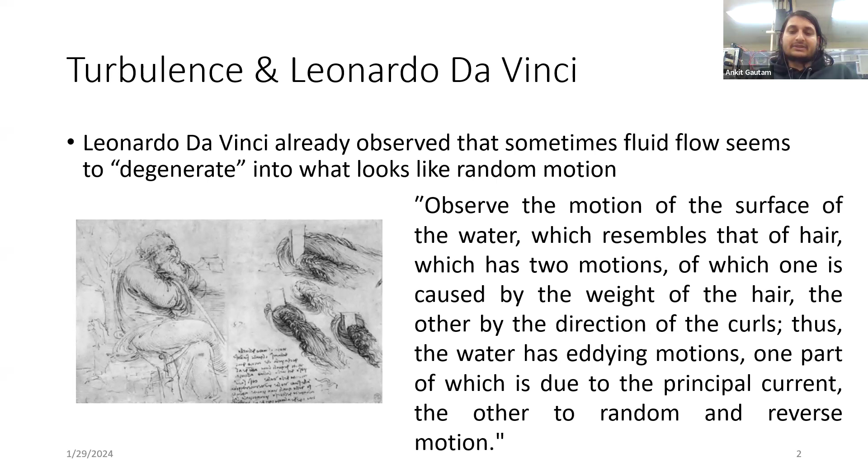First, turbulence was studied by Leonardo da Vinci. He observed that sometimes fluid flow seems to degenerate into what looks like random motion. Observe the motion of the surface of water, which resembles that of hair, having two motions: one caused by the weight of the hair, and the other by the direction of the curls. Thus, water has eddying motion, one part of which is due to the principal current, and the other to random and reverse motion.

Then turbulence was studied on the basis of Reynolds. Osborne Reynolds found that if viscous force dominates, the flow stays laminar, whereas when inertial force causes the non-linear term to dominate, it transitions to turbulence. He characterized this balance using the Reynolds number, which is the ratio of inertial force to viscous force. Flows become unstable above a certain Reynolds number.

Simple examples are two-dimensional jets, wakes, pipe flow, and flat plate boundary layers, while others are more complicated three-dimensional flows. There is a transition between laminar and turbulent flow as the Reynolds number increases.

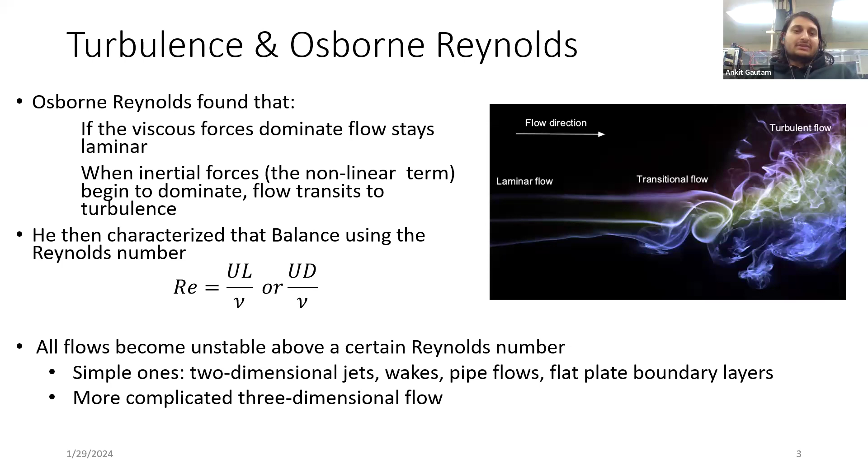How can we define turbulence? Is the flow turbulent? How can we know that?

Along the surface in external flow, when the streamwise Reynolds number is greater than 5 times 10 to the power 5, or around an obstacle when the Reynolds number gets more than 20,000, or in internal flow where the Reynolds number gets more than 2,300 - these are factors in terms of Reynolds number when the flow becomes turbulent.

Other factors such as free-stream turbulence, surface condition, and disturbance may cause an earlier transition to turbulent flow.

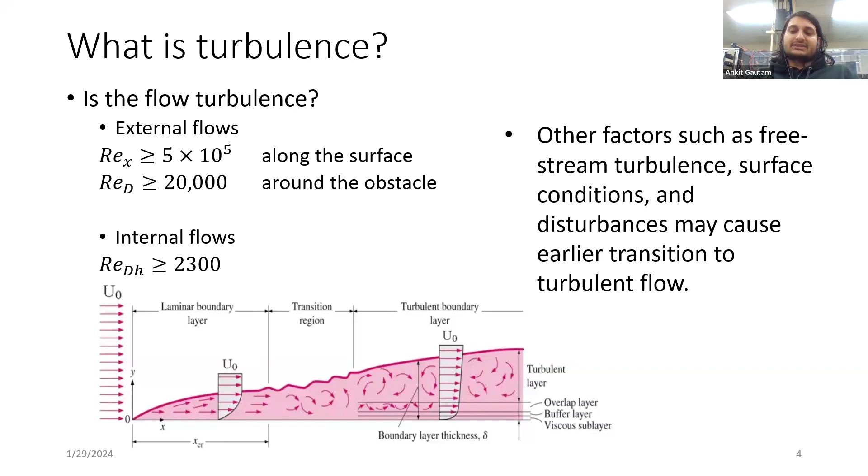What is turbulence? Chaotic and random states of motion develop in a flow, and it is termed turbulence. In turbulent flow, the velocity and pressure change continuously with time. The velocity fluctuations give rise to additional stresses on the fluid.

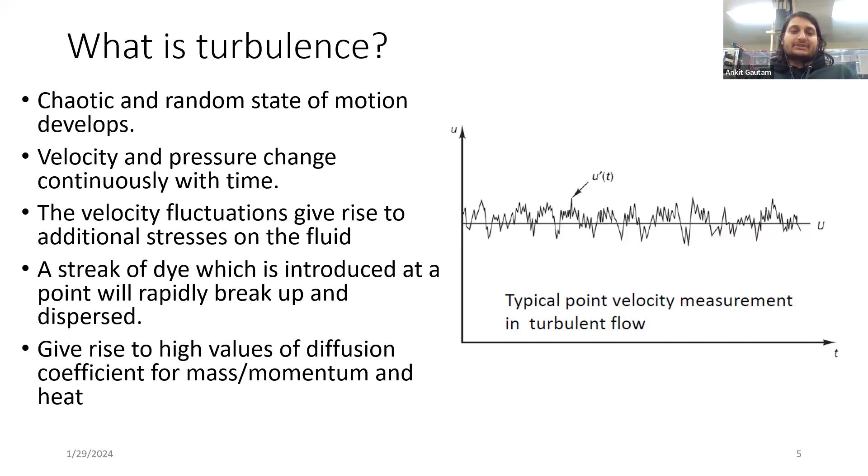A streak of dye introduced at a point will rapidly break up and disperse. This is a simple example of something passed into turbulent flow. The turbulent flow gives rise to a high value of diffusion coefficient for mass, momentum, and heat.

These are some characteristics of turbulent flow. Turbulent flow always occurs at high Reynolds number. They are caused by the complex interaction between the viscous terms and the inertial terms in the momentum equation.

One characteristic of turbulent flow is their irregularity or randomness. A fully deterministic approach is very difficult. Turbulent flows are usually described statistically.

Turbulent flows are always chaotic, but not all chaotic flows are turbulent. The diffusivity of turbulence causes rapid mixing and increased rate of momentum, heat and mass transfer.

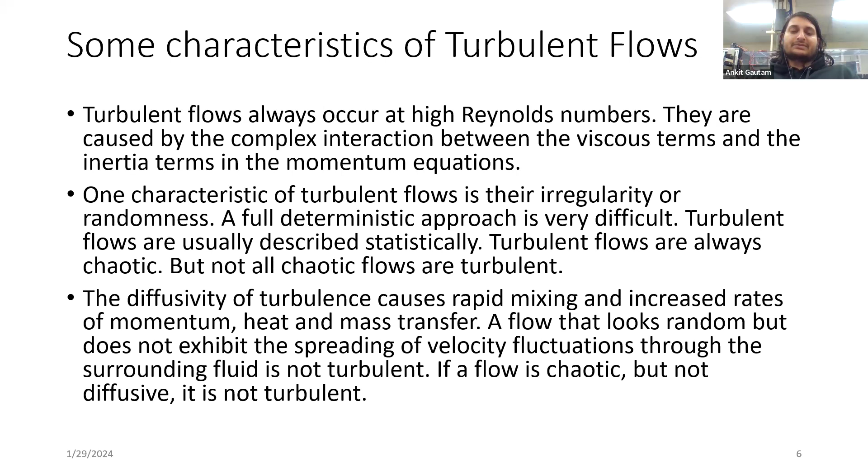A flow that looks random but does not exhibit the spreading of velocity fluctuation through the surrounding fluid is not turbulent. If a flow is chaotic but not diffusive, it is not turbulent.

Turbulent flows are dissipative. Kinetic energy gets converted into heat due to viscous shear stresses. Turbulent flows die out quickly when no energy is supplied. Random motion that has insignificant viscous losses, such as random sound waves, is not turbulent.

Turbulent flows are rotational, that is, they have a non-zero vorticity. Mechanisms such as the stretching of three-dimensional vortices play a key role in turbulence.

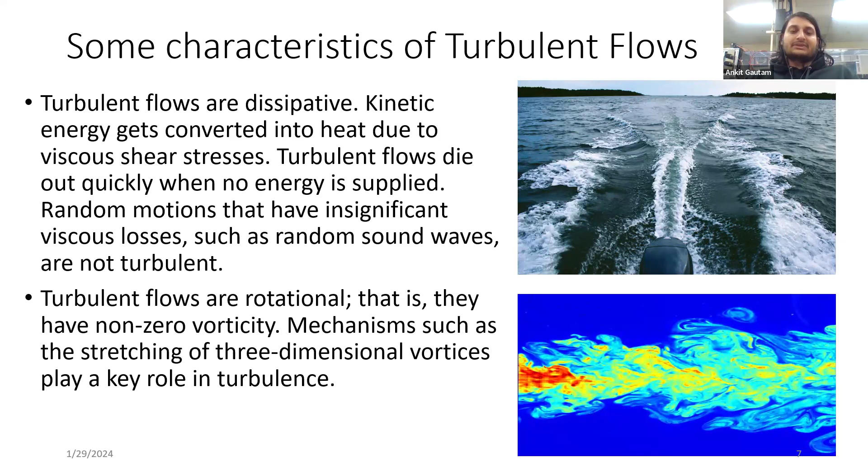Turbulence has a different structure and its properties mainly depend on the mean flow. In turbulent flow, there are rotational flow structures called turbulent eddies, which have a wide range of length scales. The characteristics of length scale will be presented in the next slide.

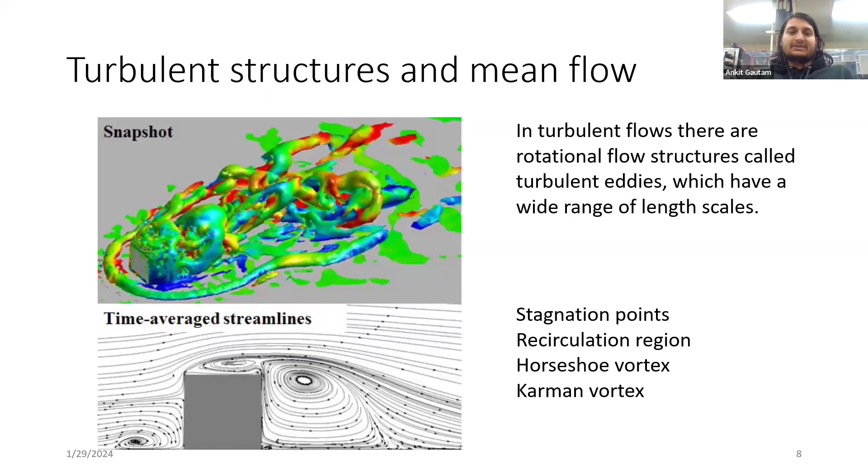In turbulent flow, there are stagnation points, recirculation regions, horseshoe vortices, and Karman vortices. This is the type of turbulent flow.

In turbulent flow, the main thing in the analysis is the Reynolds decomposition for turbulence. Reynolds proposed a very ingenious idea and wrote the velocity as the sum of the mean flow and a turbulent departure from the mean. He then split the Navier-Stokes equation along this line to get one equation for the mean and another for the turbulence. Here, what is U dash?

U dash is the variational component from the mean. If we want to measure turbulence or turbulence intensity, we usually measure the variation, which is the standard deviation from the mean flow.

Similarly, the horizontal velocity and all three-dimensional velocity components, along with pressure and density, are decomposed into a mean component and a variational component.

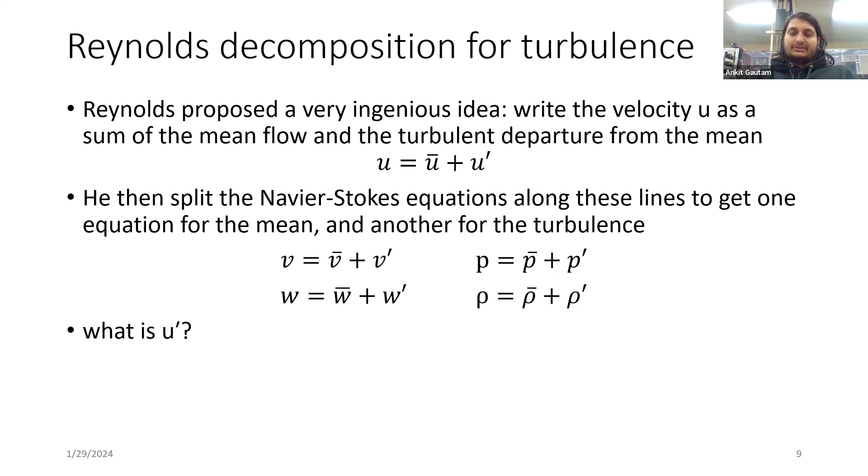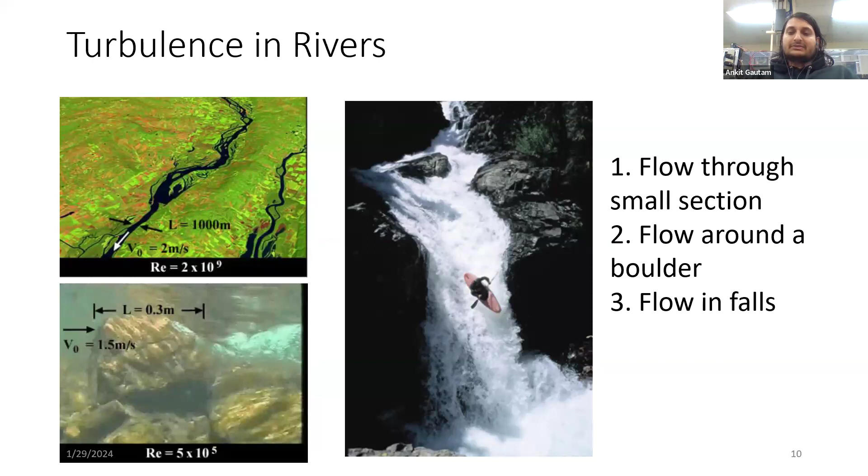Now I want to go through the scales of turbulence, which is a more important thing to be studied in turbulent flow. In turbulent flow, there are three different scales. Here you can see the picture showing these three different scales.

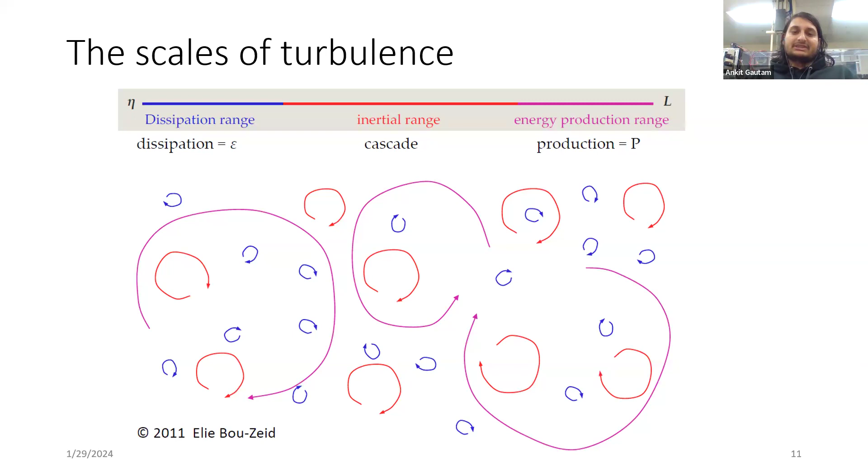The pink ones are the large scale, which are the energy production scale. The red ones are inertia scales, which are the medium size scale. The blue ones are the small scale, and they are the dissipation scale. Now I want to go through the characteristics of the different scales of turbulence.

First, I want to go through large scale, which are also known as energy production range. These are affected by the boundary conditions in our flow specific. They interact with the mean flow, transforming mean kinetic energy into turbulent kinetic energy. They produce almost all convective and advective flux. They have a large eddy Reynolds number, and the large scale are highly anisotropic, with fluctuations different in different directions.

Now the inertial subrange, also known as the intermediate scale. This scale does not interact directly with the boundaries or mean flow and is flow independent. It receives the cascading turbulent kinetic energy and passes it on to the smaller scale. Turbulence is homogeneous and isotropic according to the Kolmogorov theory.

Now the smallest scale, or dissipation scale, does not interact with the boundaries or mean flow and is flow independent. It dissipates all the turbulent kinetic energy into heat, low source of heat. The smallest turbulent scale is called the Kolmogorov scale.

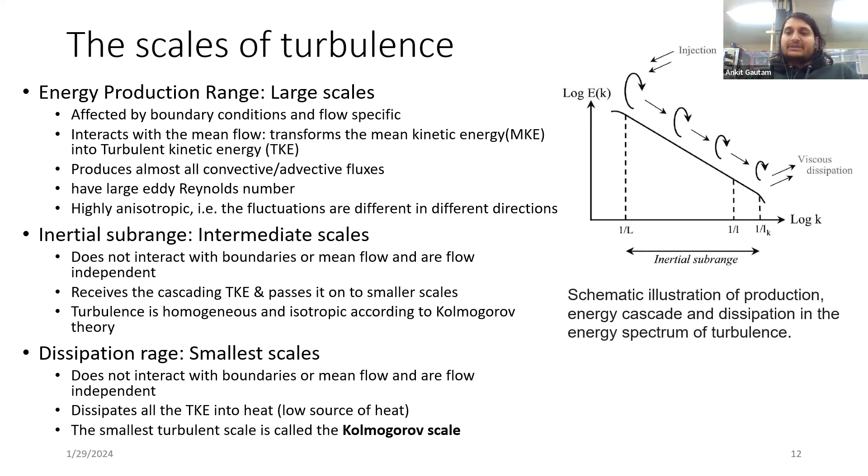Here we can see the picture of the energy spectrum, showing the schematic illustration of production, energy cascade, and dissipation. The high amount of energy is carried by the large scale, and the dissipative energy is carried by the small scale.

Kolmogorov statistically describes the main features of the smallest turbulence scale, known as the Kolmogorov microscale, which is the length scale. These are related to the time scale and velocity scale, shown here, and how they interact with dissipation and viscosity.

The process of changing from large scale to small scale is through vortex stretching. Vortex stretching is the lengthening of vortices in a three-dimensional fluid flow, which is associated with a corresponding increase of the component of vorticity in the stretching direction due to the conservation of angular momentum.

Vortex stretching is at the core of the description of the turbulent energy cascade from large scale to small scale in turbulence. In this way, kinetic energy is handed down from large eddies to progressively smaller eddies, which is termed the energy cascade.

Here in the figure, it is shown the Kolmogorov five-thirds law. This law states that in the inertial range, the energy cascade depends only on the size of the eddies. Significant experimental evidence supports the inertial cascade at large Reynolds numbers, and this is verified by many experiments conducted in past research.

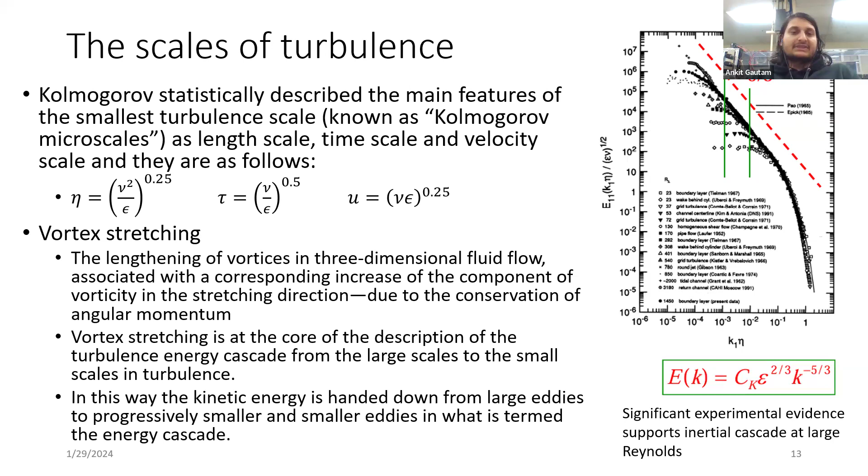Now I want to go through the turbulent boundary layer, which is important not only in theory but also in the modeling aspect, as the boundary layer provides the main aspect of designing and modeling turbine systems.

The turbulent boundary layer consists of four regions. The viscous sublayer, which is a very thin layer next to the wall where viscous effects are dominant. The buffer layer, in which turbulent effects are increasing, but the flow is mainly dominated by viscous effects.

The logarithmic layer, in which turbulent effects are much more significant, is denoted by the equation shown here, which is a popular equation while dealing with the turbulent boundary layer. And another is the outer layer, in which turbulent effects dominate over viscous effects.

The term boundary layer thickness is usually introduced in the turbulent boundary layer. Boundary layer thickness is the vertical distance from the wall to a point where the flow velocity reaches 99% of the free stream velocity.

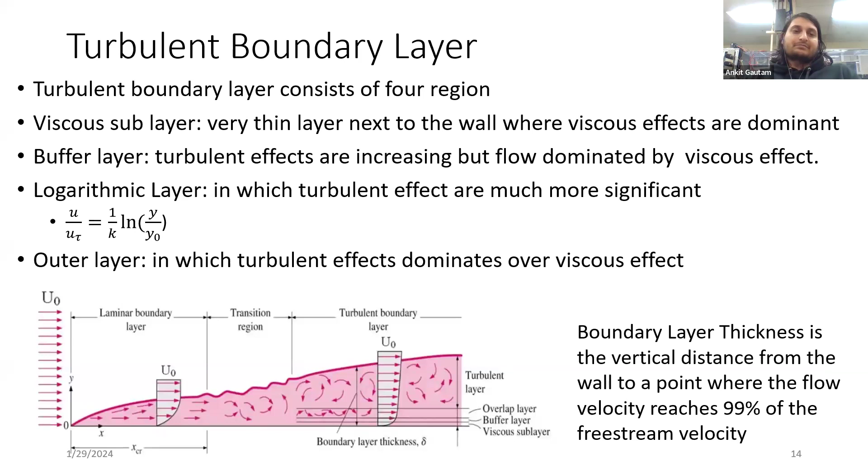The different turbulent flux terms used in turbulent flow are shown here. The first term is the effect of turbulence on the mean flow, which is a product of the variational velocity in two directions.

Next is the turbulent stress applied on the mean flow, which acts almost like a very strong viscosity. The third term is the effect of turbulence on the mean temperature field, and the fourth term is the turbulent heat flux, which acts almost like a very strong diffusivity.

Similarly, the fifth term I introduced is about concentration, in which the turbulent flux of pollutant or water vapor is considered.

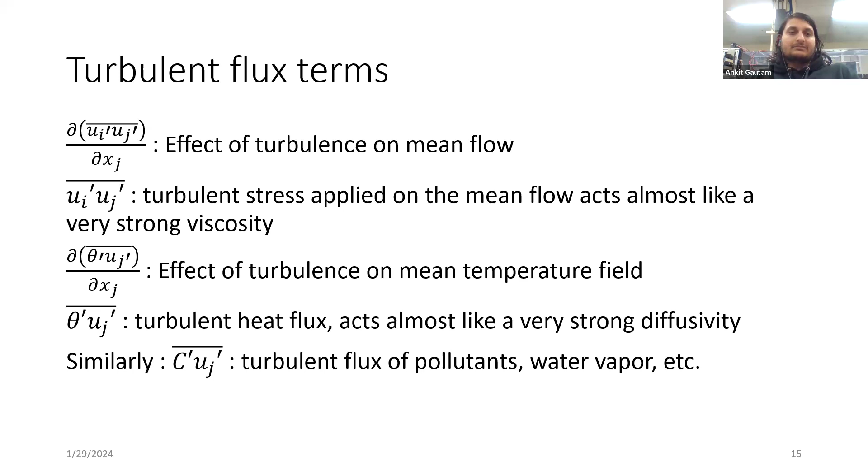The reason the turbulent flux terms are important is because many models cannot solve the full equation - they are too demanding computationally. They solve the mean equation only, but in this equation we have this additional unknown, the turbulent flux, that we need to model.

This is the turbulence closure problem. At the surface, these turbulent fluxes are the wall stresses, flux of heat, water vapor, and momentum formed at the surface of the fluid. We need to model a special surface closure, or measure them near the wall, to describe the fluid interaction.

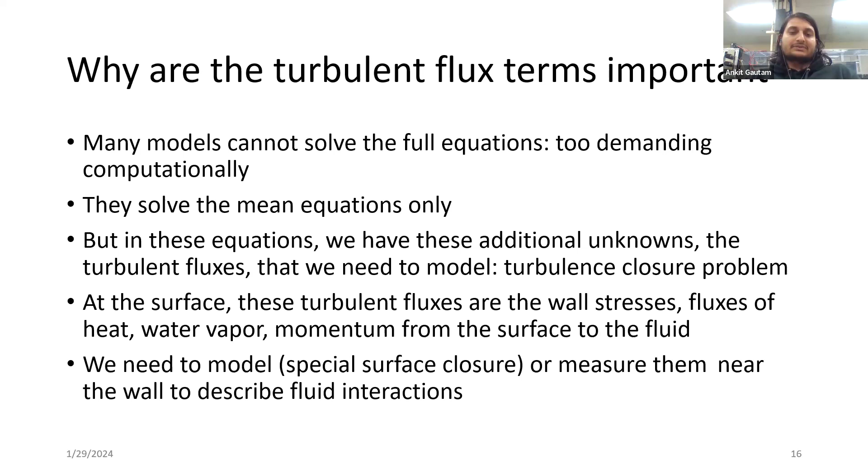These are the important terms and parameters that are used in turbulence.

Taylor microscale is a length scale that characterizes the size of the large energy containing eddies in a turbulent flow. Enstrophy is a measure of the rotational energy per unit mass in a turbulent flow. It is related to the intensity of vortices.

Turbulent dissipation is the rate at which turbulent kinetic energy is converted into internal energy or heat energy due to the viscous effect in the fluid.

Integral length scale is a length scale characterizing the size of the large eddies in a turbulent flow. It is often used in the context of describing the spatial structure of turbulence.

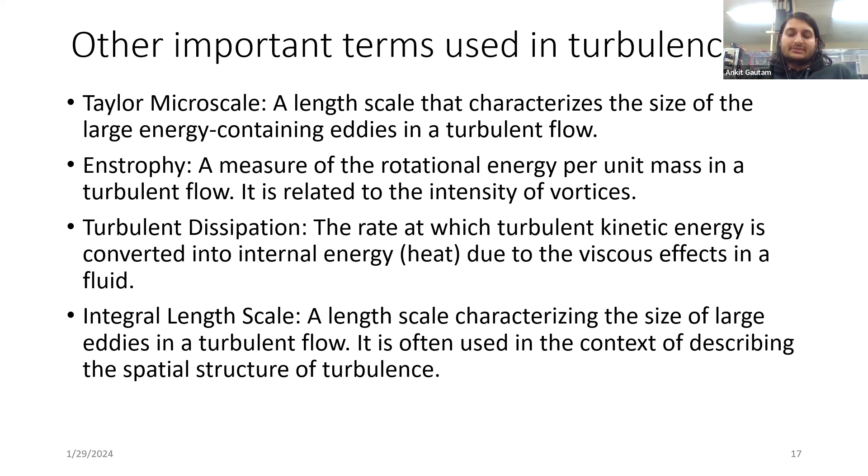Now, why do we care about turbulence? Turbulence is mainly used in many fields, such as aerodynamics in aviation, to find the performance and stability of aircraft, efficiency in engineering, weather prediction and climate modeling.

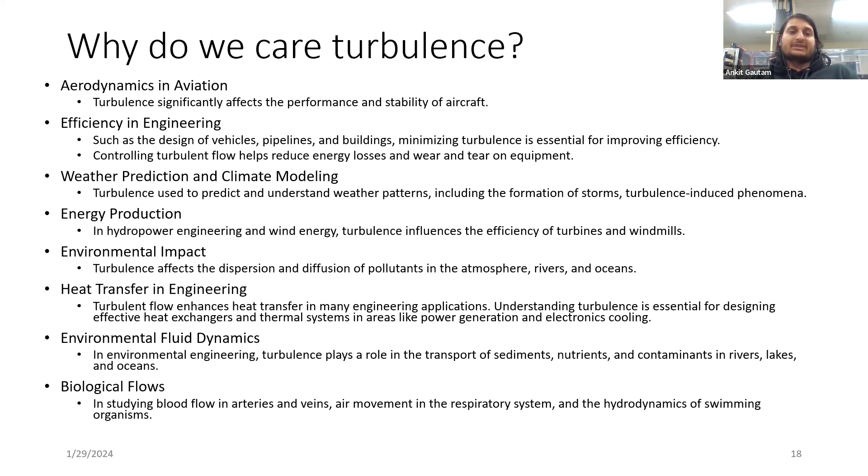Especially in energy production in hydropower and wind energy plants, environmental impact, heat transfer in engineering, environmental fluid dynamics studies, biological flow, and many other fields where turbulence is used. But this consists of the main core areas where turbulence is used.

Now I want to go to the modeling of turbulence. Why do we want to model turbulence? Direct numerical simulation of the governing equation is only possible for simple low Reynolds numbers.

Instead, we solve the Reynolds-averaged Navier-Stokes equation. You can see the equation in the slide, and here we want to model the Reynolds stress. The main part of modeling turbulence is modeling the Reynolds stress, how we can take the effect of Reynolds stress from the flow into our numerical model.

Time-averaged statistics of turbulent velocity fluctuations are modeled using functions containing empirical constants and information about the mean flow. Large eddy simulation numerically resolves large eddies and models small eddies.

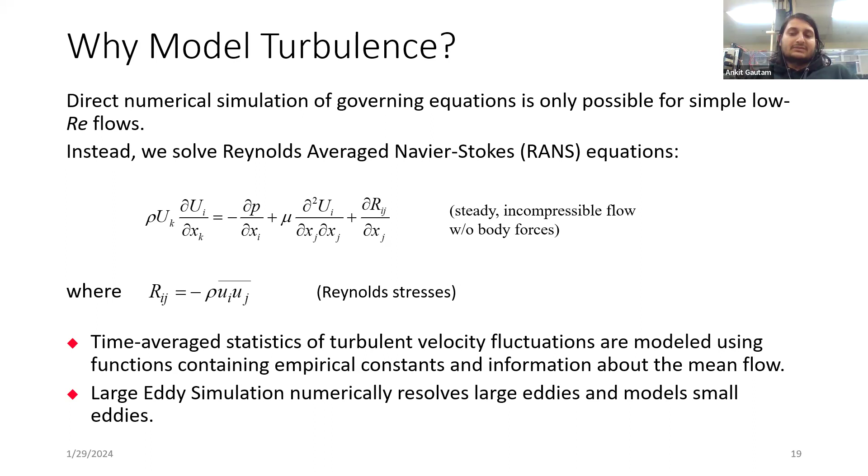How complex is the flow? How do we know the complexity of the flow? The complexity of the flow can be known through the extra strain rate, which includes streamline curvature, lateral divergence, acceleration or deceleration, swirl, recirculation or separation, and secondary flow.

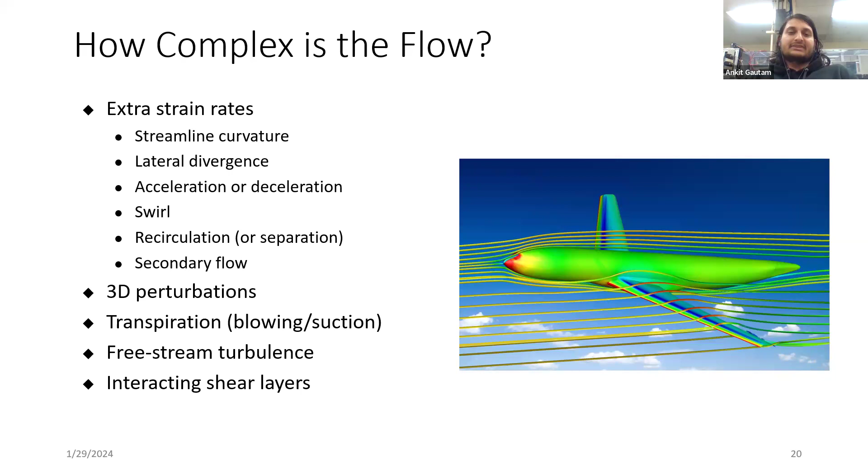3D perturbation, transpiration, blowing or suction mechanism, free stream turbulence, interacting shear layers. These are different aspects of how the flow can become complex.

How can we make our choice for a turbulence model? First, we have to consider the flow physics and the computational resources we have. Then we can go through the turbulence model.

In this way, we have to consider how to make the choice.

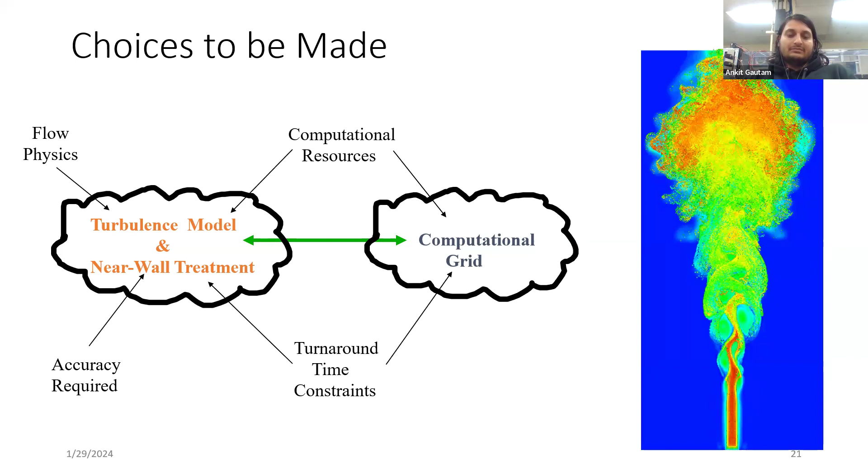Now I want to go through turbulent modeling approaches. There are different turbulent modeling approaches: zero equation model, one equation model, Spalart-Allmaras model, two equation models, standard K-epsilon model, RNG K-epsilon model, realizable K-epsilon model, Reynolds stress model, large eddy simulation, and direct numerical simulation.

These are popular numerical tools that are used for turbulence modeling. Apart from large eddy simulation and direct numerical simulation, all of them are RANS-based models.

In the numerical models that are enclosed in the black box, these are available in the popular software called ANSYS, in ANSYS Fluent.

The main thing we have to consider is the increased computational cost for iteration. As shown in the picture, the RANS-based models are shown to perform very well if used for most useful research.

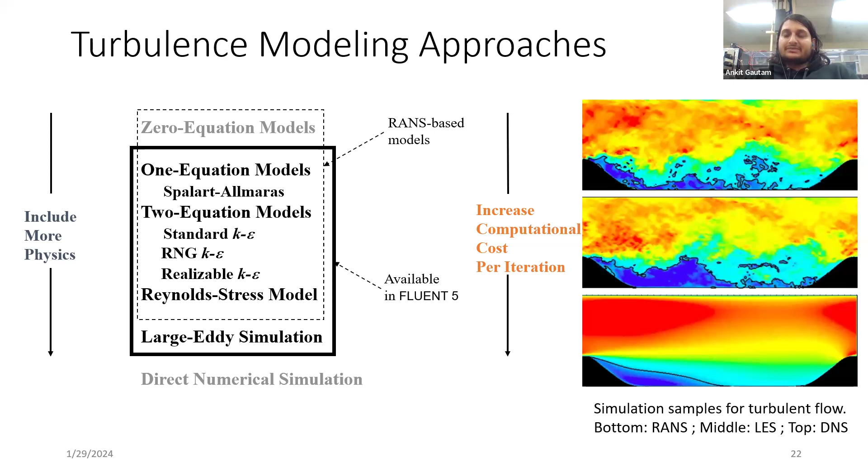For example, DNS shows a more accurate model while RANS shows a less accurate representation, because LES and direct numerical simulation include more physics compared to RANS-based models. That can be seen in the figure attached here.

The one equation model or Spalart-Allmaras model is designed specifically for aerospace applications involving wall-bounded flow, boundary layers with adverse pressure gradients in turbomachinery.

The one equation model can use a coarse or a fine mesh as well. It is designed to be used with a fine mesh as a low Reynolds number model throughout the viscous affected region, and it is sufficiently robust for relatively crude simulation on coarse meshes.

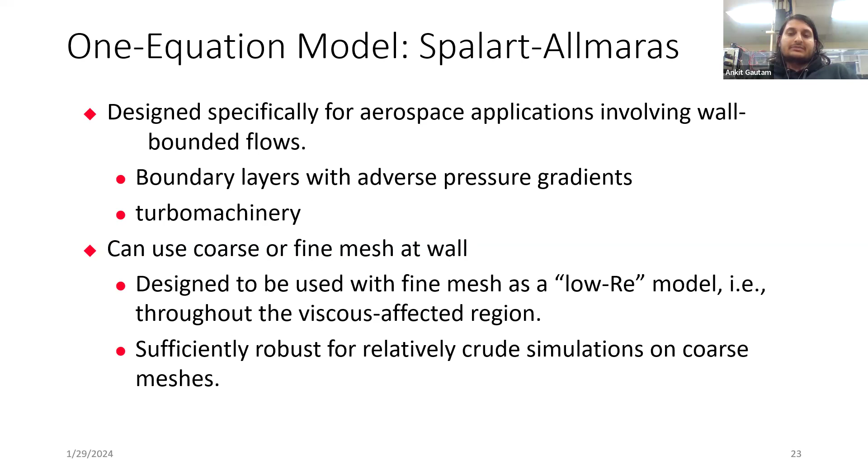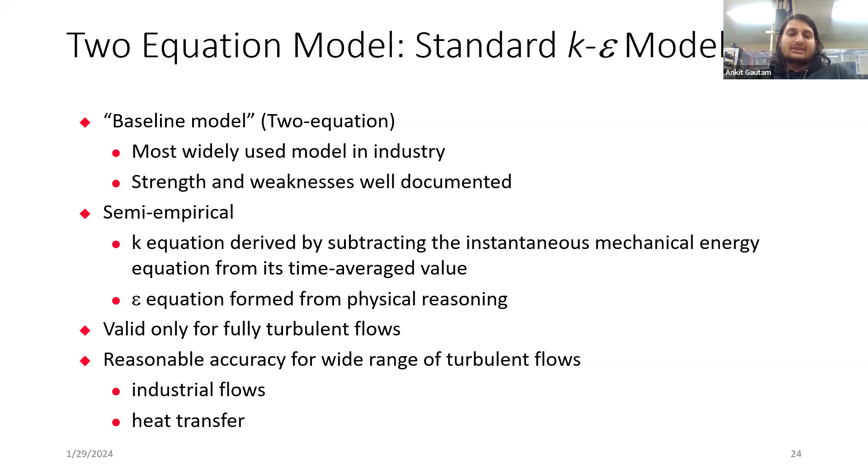In this equation model, there are many equations, and we have to change the parameters according to the physics of the flow. We have to choose how to change the parameters, and more importantly, add certain terms, which is why we get different equation models. These equation models are valid only for fully turbulent flow and have reasonable accuracy for a wide range of turbulent flows in industrial flow and heat transfer applications.

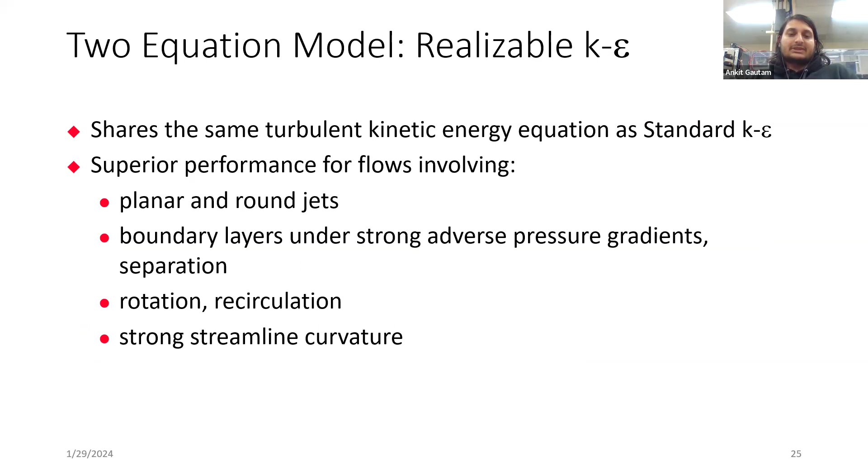The realizable K-epsilon model shares the same turbulent kinetic energy equation as the standard K-epsilon model. It shows superior performance for flows involving planar and round jets, boundary layers under strong adverse pressure gradients, separation, rotation and recirculation, and strong streamline curvature.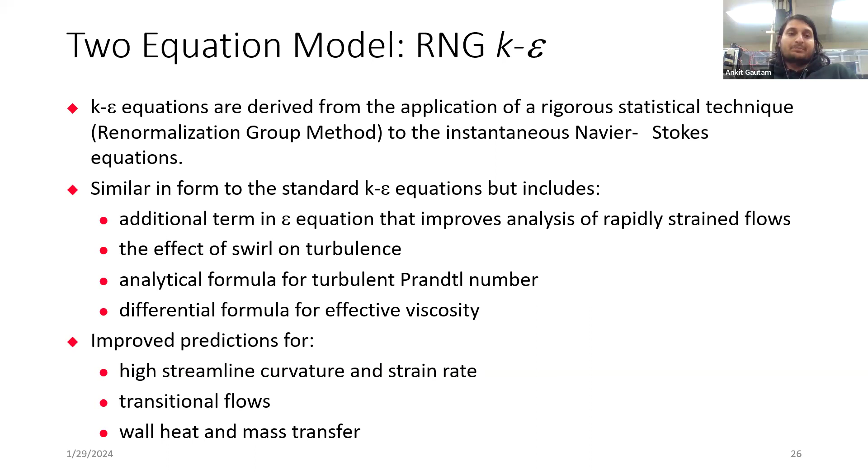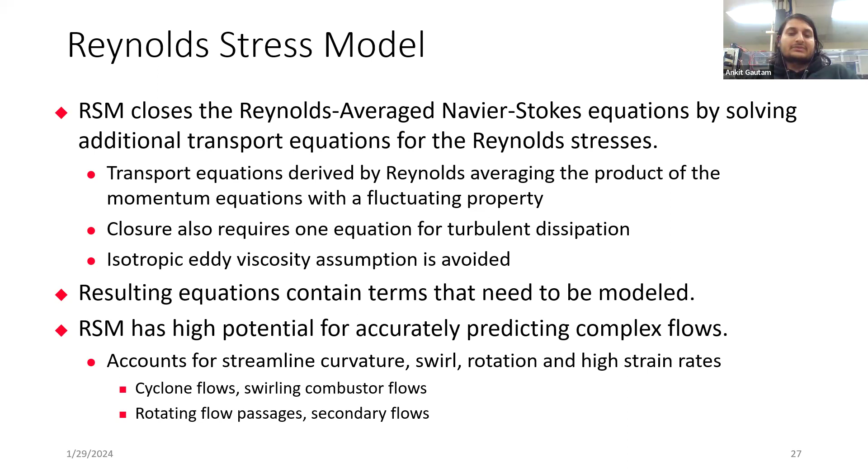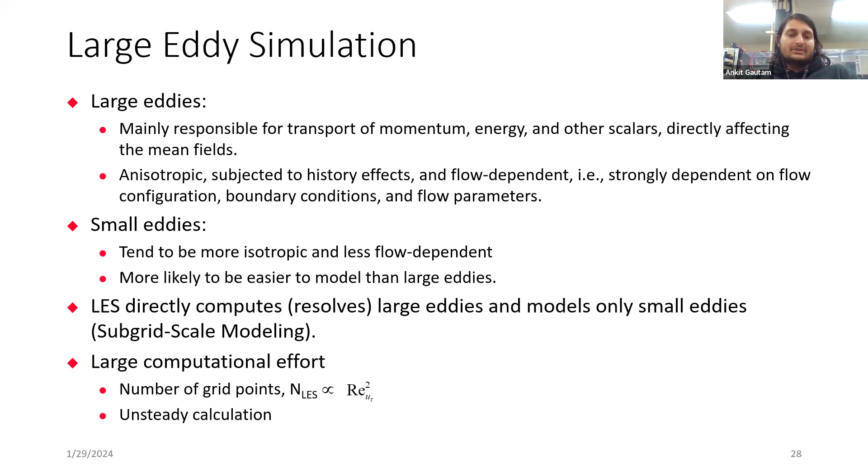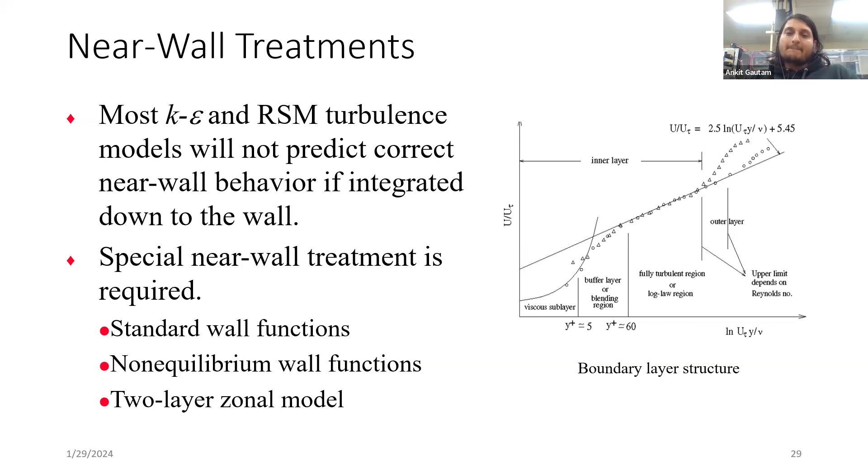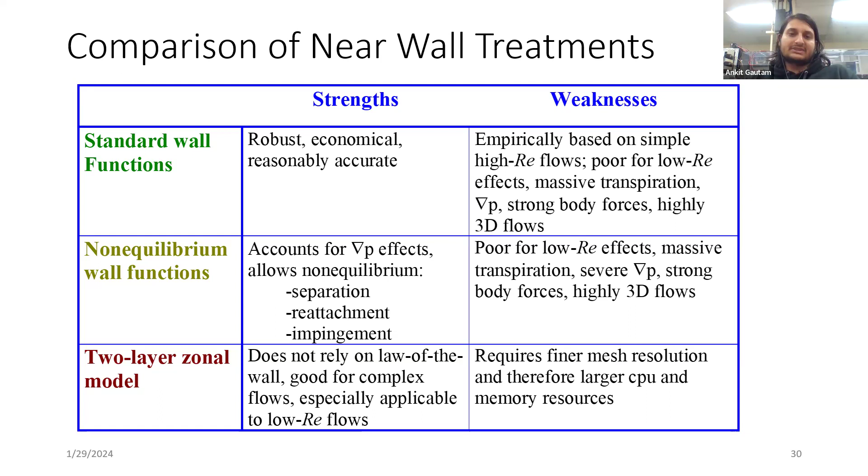The two-layer zonal model does not rely on the law of the wall. It is good for complex flows, especially applicable for low Reynolds number flows. Its weakness is that it requires finer mesh resolution and therefore larger CPU and memory resources.